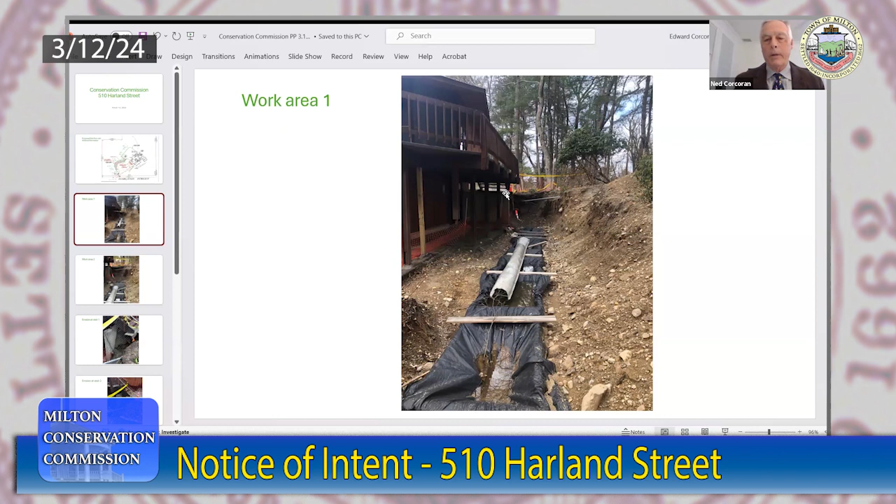This is a look into where the work had started, and the erosion is happening here with ground that has pulled away from the area below the stair. We met with the notion that this was a pretty emergent situation, that we needed to shore this up. And so we asked John by phone after I met with Steve in the field if we could get going on the placement of footings along this area, where the retaining wall would be, and then form the wall so that we could pour concrete. The work would be done by hand, using hand tools and not mechanical tools.

This is another view looking from above down into this area. This has all deteriorated away. It has worn away behind this concrete wall. This is a separate view looking in. You can see how this all has been eroding away with recent rains.

With that, I'm going to turn it over to Bill Madden. We've got 3 fairly simple slides that show the proposed work. And you can see this would be looking sort of into where the work was being done under the porch wall that would be coming this way and then coming towards you in the plan.

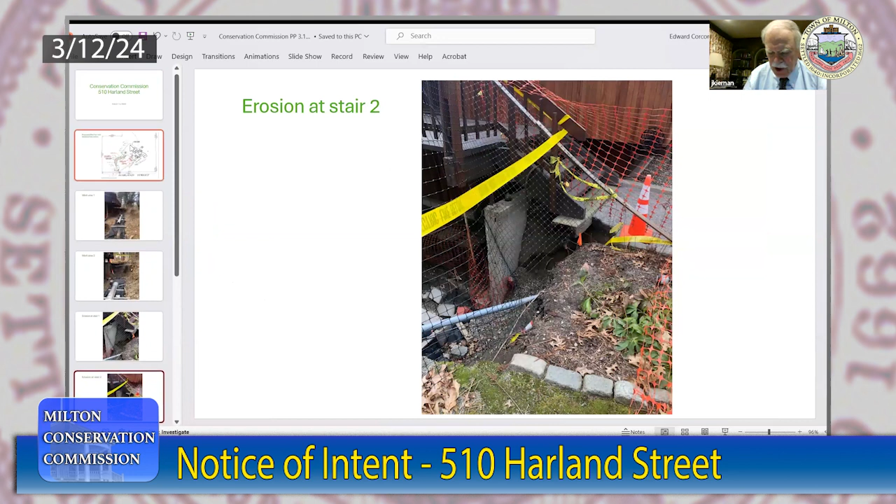Bill? Hey, Ned, before you pass the baton, can I ask you a question? Sure. Not in the picture that you're sharing, but on the previous slide that you shared, the driveway that goes to the right has got that orange line going up the driveway to the house, but I don't know what that is. Is that a utility line? That's a utility line. Thank you. That's just there. It's showing as part of the existing condition. Understood. Thank you. Great, thanks. Go ahead, Ned.

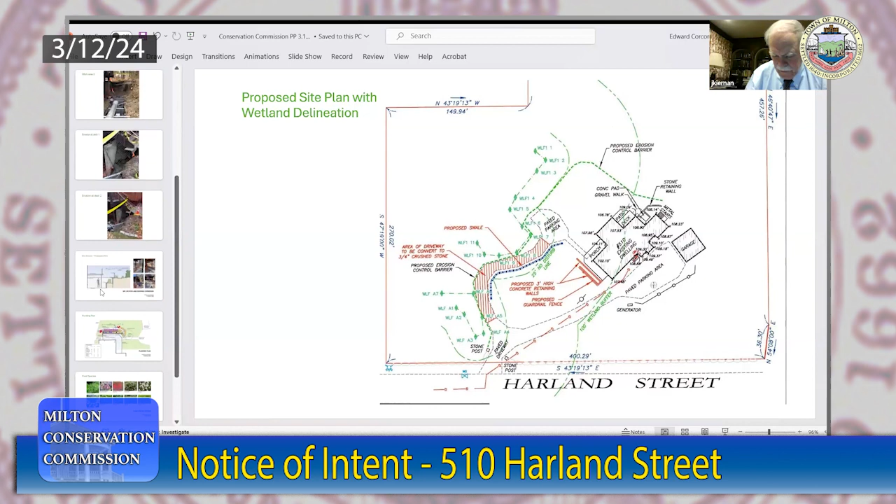Thank you. Good evening, everyone. My name is Bill Madden, landscape architect, and I've had the wonderful opportunity to collaborate with B.V. Williamson on developing a very modest plant palette for this new landscape intervention. As Ned noted, there are 2 retaining walls that were being built to replace the previous timber retaining walls.

And so we have a unique situation where our plant palette needs to do multiple things. And it's very important to us that it does multiple things, as this is a very shady environment. So it needs to be resilient and durable with limited sun, rabbit and deer tolerant or resistant, and also native. The homeowner is very thoughtful and respects this sensitive ecology. So that's a lot of filters of decision making that we've been thinking about with the planting.

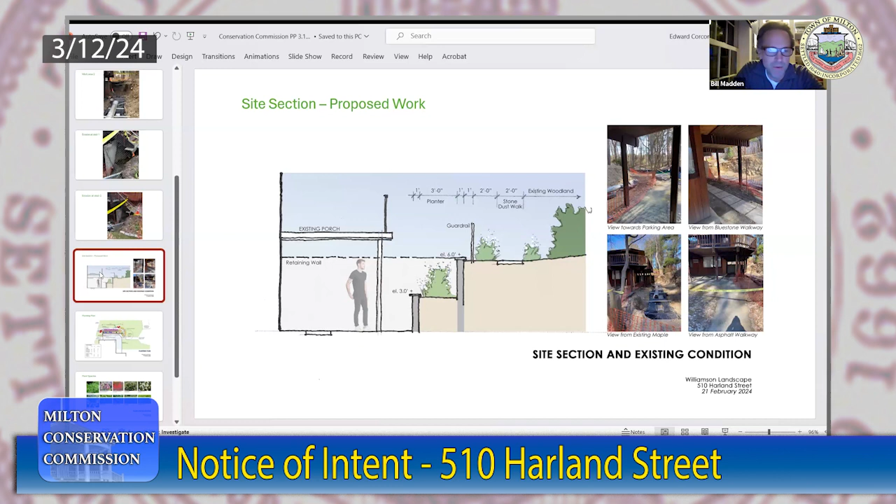Now, if you go to the next slide, you can start to see the planting layout. There is a small stone dust walkway that's connecting the existing driveway to the left that wraps you down the sloping topography to the right. And so in the spirit of being sensitive to this type of landscape, we're proposing a stone dust walkway, so it can be primarily porous over time. And then a diverse plant palette.

If we go to the next slide, Ned, we're using, again, shade tolerant native plants for the most part. And the sweet fern is primarily used for erosion control because of the steep slopes and hardiness within the limited amount of sunlight. I'm happy to answer any questions about the planting strategy for this terrace landscape if you'd like.

I would just point out one thing. This is a different orientation. This is the proposed new retaining walls here. And this is the area where the erosion was really taking place, below and proximate to the stair here. And it's where we felt we needed to get in right away yesterday and shore that up. Where is the material being carried that's eroding from there? Just down into where the trench area had already been. I got you. Right. So just down into here.

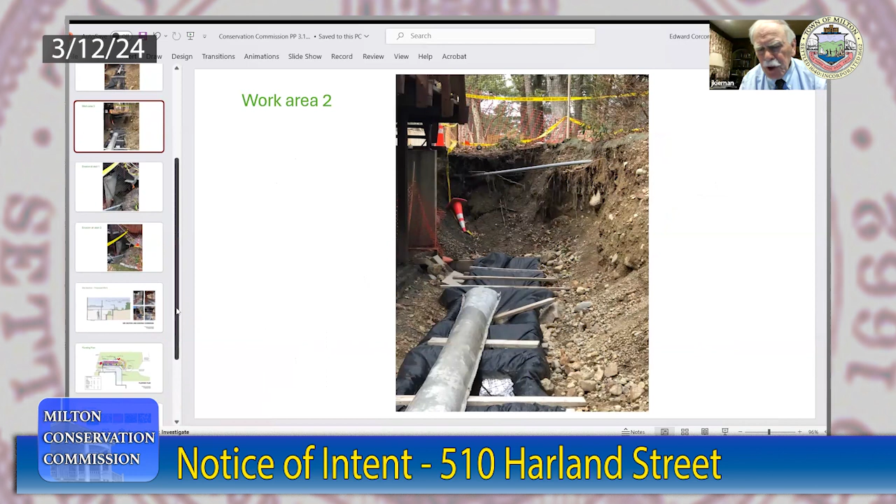Ned, can you go back to that, or perhaps Bill, because Bill mentioned a stone dust path, but I don't see it on your diagram. Where is that located? It's parallel to the retaining wall, the top retaining wall. You see it in a light blue color along the purple plants that we're showing there. Understood. So it goes from the left driveway to the right driveway? Correct. It's high on the left side where the existing driveway is, and then drops down as you move to the right. Understood. Thank you. This is about a 6 or 8 foot drop. So it stairs down.

All right, questions from commissioners? I think Ned has correctly pointed out we should do a site visit to approve the delineation. Before we even get a site visit, are there questions or comments from abutters or members of the public?

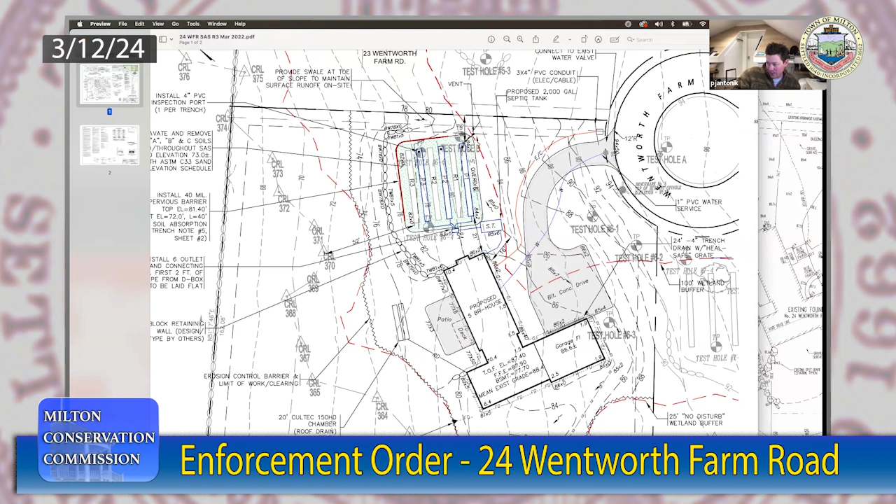And then the second issue was that right around the 86 mark here, and I could show you on a separate plan, there is a 2-inch drain that we added. Now you'll notice down here, you'll see this footing drain, and then on it, a trench drain with heel-safe grate. So this 24-foot, 4-inch wide trench drain that goes along the garage was to be connected to the drainage system that was ultimately connected to this Cultec chamber in the back. So this runoff drain, RD, comes from all the gutters and this drain here.

So in the original design, all the water from the driveway was going all the way to the house. Now we installed this drain and all the drains around the house, and this Cultec system, per the plan.

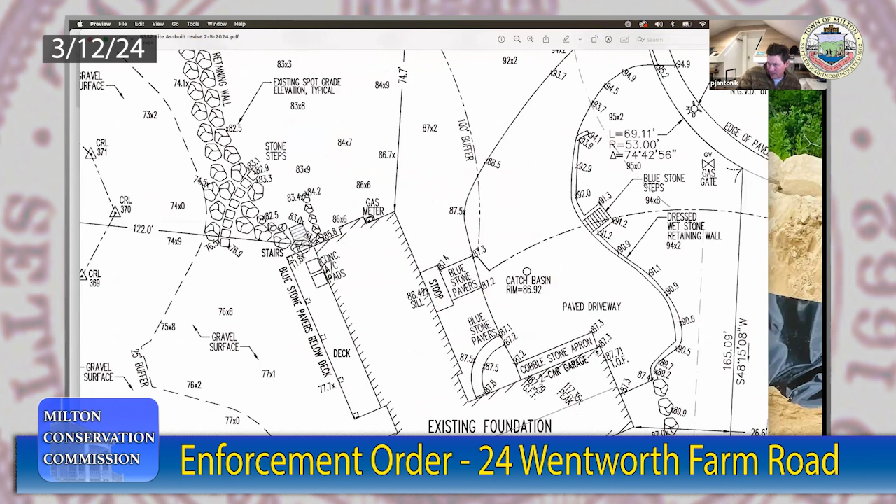We installed the septic, a wall, and this 40 mil liner. This site plan was done when we did the foundation site plan for the permit. You'll notice the catch basin here. He does not notate the drain, but it is installed at that cobblestone apron. He shows this boulder wall here that we installed.

Sorry, who's the 'he' that you're referring to? This is the site engineer who did the original plan. Who was that? Jeff Kane.

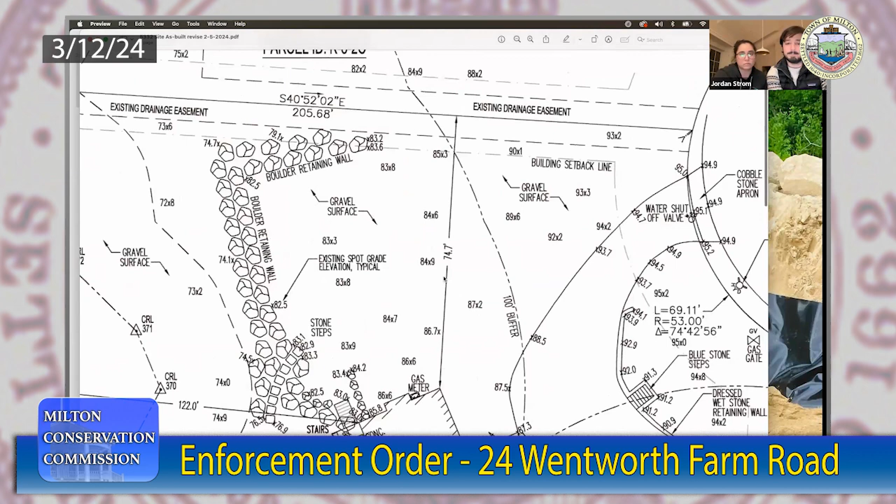Jeff Kane, yes. When we were working on the septic, Jeff wasn't as readily available and he was holding us up because of his schedule. So we ended up using Terry McSweeney, an engineer out of the South Shore, to do our septic as-built, which is right here. The septic as-built was approved by the health department and signed off on the 28th with a certificate of compliance. You'll see, as notated, the 40 mil rubber membrane along the wall.

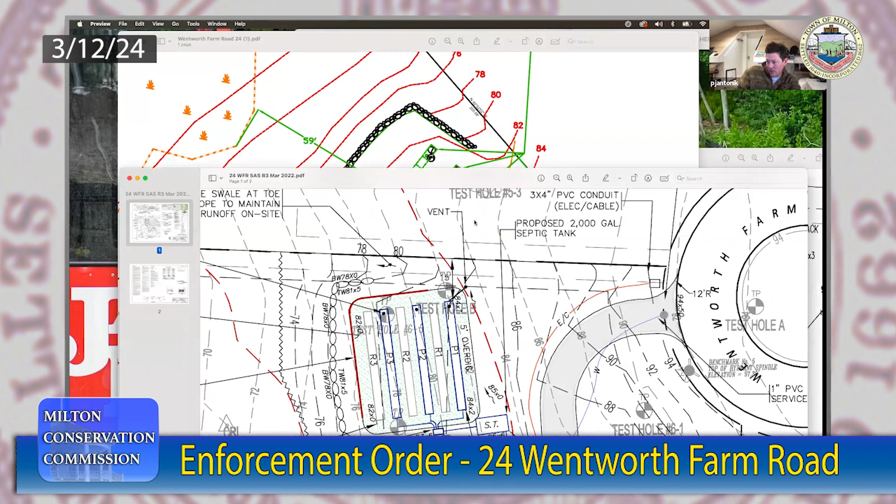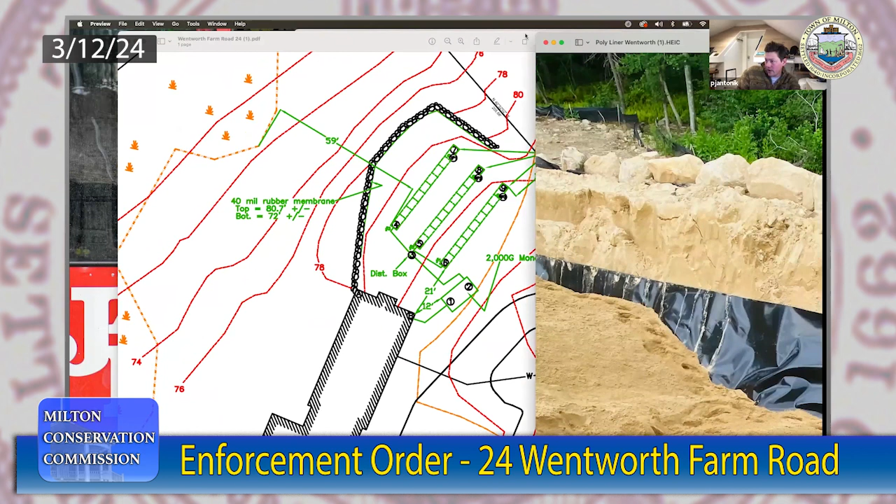Another note I want to mention is that we're 59 feet from the wetlands with our actual system, whereas originally the distance was 52. So we are further away from the wetlands with our system. This was approved and the COC was issued. You can see the mil liner right here against the block wall. And then lastly, this is the engineer's letter stamped by Bowdon Engineering certifying that the wall was sufficient.

Now you'll notice there's significant erosion just because there's no plants yet, right? So we're not concerned about the erosion. I was there today, actually, after all that rain. There's a couple issues here and there, but considering the amount of rain we had and the fact that there's zero grass, I was pretty impressed with the lack of erosion.

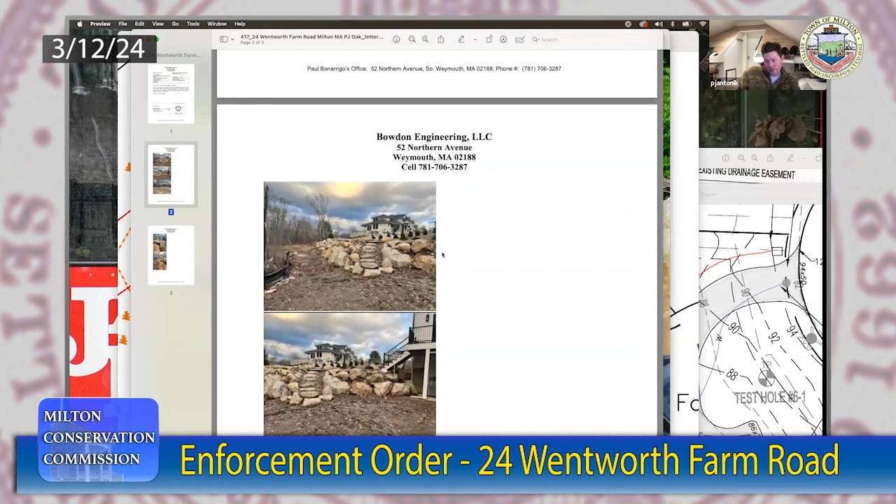So we're putting sod in on the area above the wall here in two weeks. And we're going to also be planting the rest of the grass around the back with seed. So the erosion should be mitigated once all of that vegetation takes hold.

Now the last thing is the drain, which was installed here. That drain wasn't anything but, and again, you can see the catch basin right here. That is purely to catch the large amount of rain coming down the driveway, because the house was getting flooded due to the large amount of rain.

And I can show you here. Forgive me here for a minute. The catch basin—can everybody see that? Okay. Yes, yeah, we can see it.

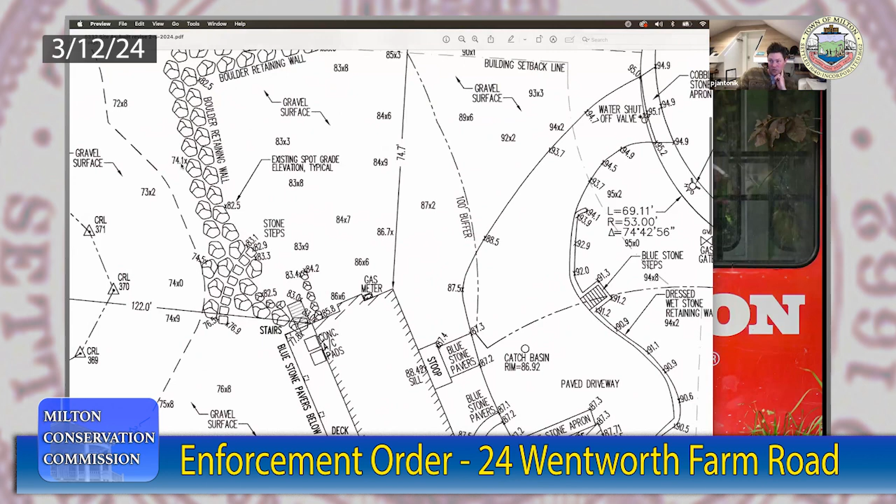So again, to recap, we have the catch basin, which we put in to help mitigate the large amount of water runoff from the street. And then we have the stone wall, which we put in as designed—what's it say here? The type of design by others. We ended up going with the retaining wall made out of boulders from the site, avoiding transporting them off-site, saving money, and also the natural aesthetic is what my client wanted.

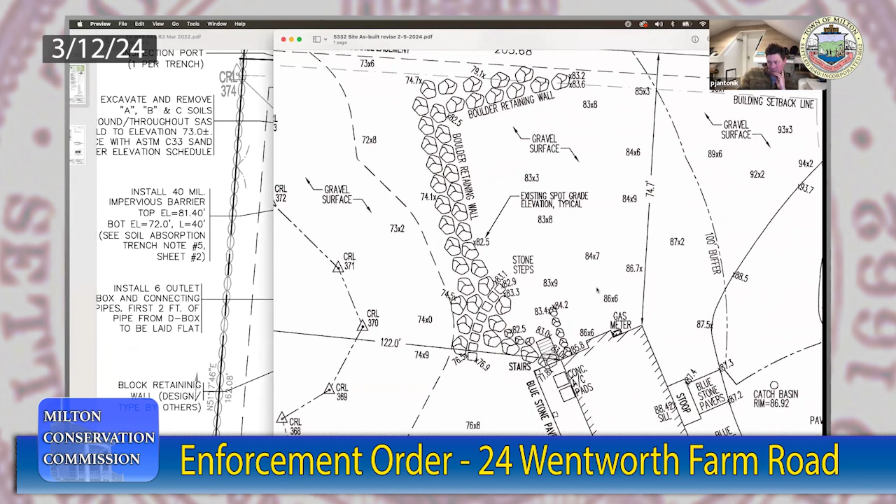And then obviously we put the septic in and had it approved. Moving forward, our plan is to finish the vegetation to stop the runoff. And then once everything is established, we would remove the erosion control, but leave it in place until all of that is established.

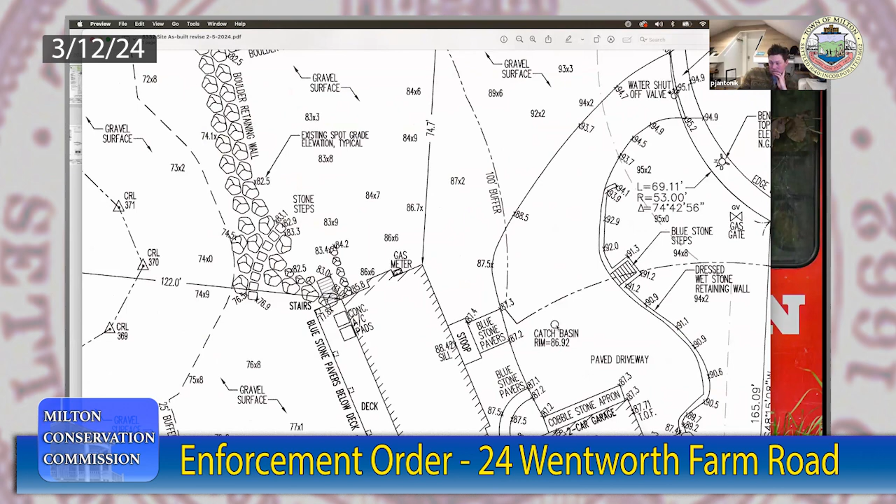I understand what you said about the catch basin right around elevation 86, and you're piping it sort of up in the diagram as we're looking at it, to that corner right there. Correct. But in your original calculations for the size of the Cultec chamber in the back of the home, is this an increase in water?

I understand that the water would have gone into what I would call a French drain or the trench drain anyway, but it sounds like it's more water than anybody expected coming out of the higher elevation, whether it's overtopping the detention basin or just coming off the street or whatever it is.

No, I think in a normal rain event, it's the exact same amount of water because it's just the water from our site. And honestly, in a regular rain event as well, the water would have just sloped toward the house, right? And so we had some leaks in the basement. We had water going into the garage, and we just didn't feel that the original design was going to handle...

Listen, the way that this site was so difficult with the way that all the elevations were, there was no way to anticipate the exact runoff a year and a half prior, right? Once the site is completely designed, sometimes you have to make on-site changes to adapt. And listen, we could have left it and I could have pitched the driveway to go toward the garage and it all could have gone into that drain. But I just felt uncomfortable with that. So we added the second drain just as a precaution.

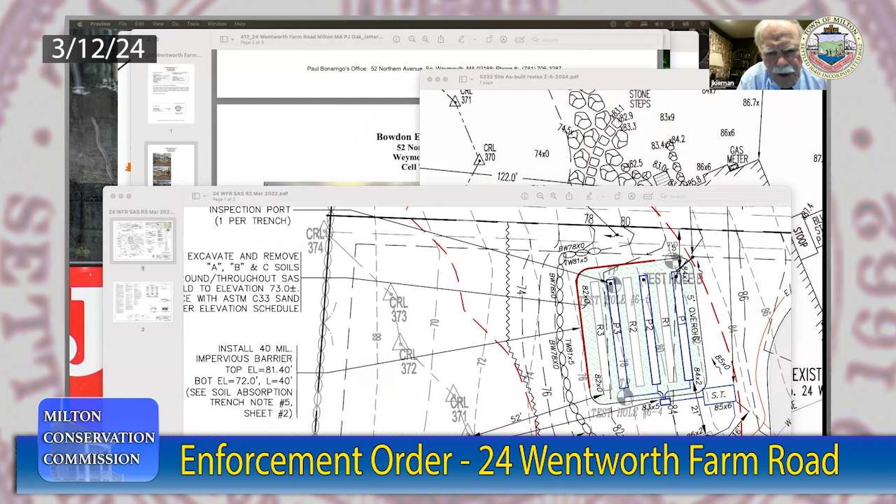It does. Can I ask you this? The pictures that you just showed us and you actually submitted earlier to the commission, am I correct that those pictures showing the garage were before you had done the grading exterior to the house? And prior to putting in the cement floor of the garage? Yes, you are correct.

And I think what it was is we had so much water come in that it made us nervous, right? And so this grade is probably 8 inches lower than the final concrete slab, right? But it's a lot of water, and it was ending up seeping into the basement over where I'm standing when I take this photo, right? So water is a developer's enemy when it comes to turning a house over. The last thing we want is calls saying that my basement's flooded. So it was just a precaution to put the drain in so that we didn't have any further issues.

And if I can add to that, even after the concrete floor went in for the garage, and everything is said and done, we still get some water in the garage, even with the existing drains in place. And so this is still minor amounts of water compared to what we were getting beforehand, for sure. But it is some amount still.

All right, thank you. Now, we did receive, and it's now part of our record, the notice from Bowdon Engineering saying, and I'm quoting here, based on the size and placement of the rocks, I find this gravity wall is acceptable to perform its intended function to restrain the soil force to overturn the wall. That's not exactly what we'd be looking for if we were considering a certificate of compliance for the septic system.

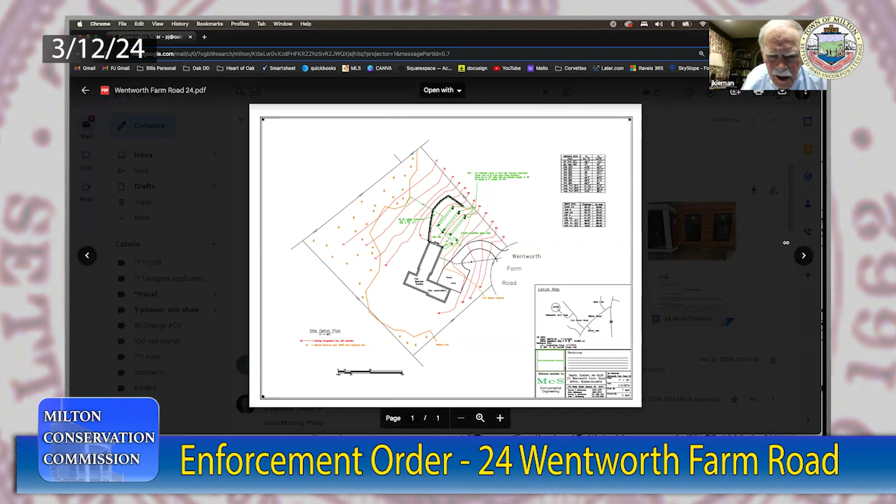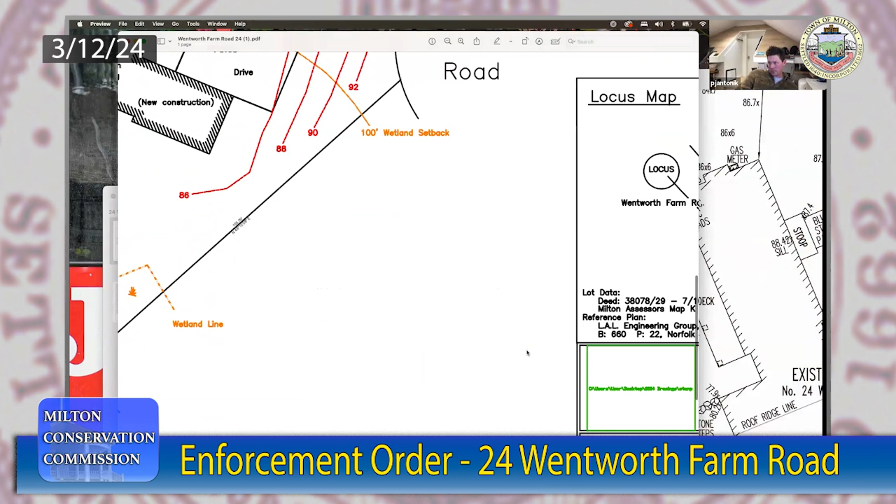And did that person observe this before it was backfilled or not? Yes, he came out, he did the as-built based on the in-person site visit. He created the as-built and he submitted it to the Board of Health. What date did he view this? Give me 1 second. Sorry, just trying to find the right file here. This was done on January 4th, 2024. Well, it was backfilled back in what, September or October, so he clearly didn't see it.

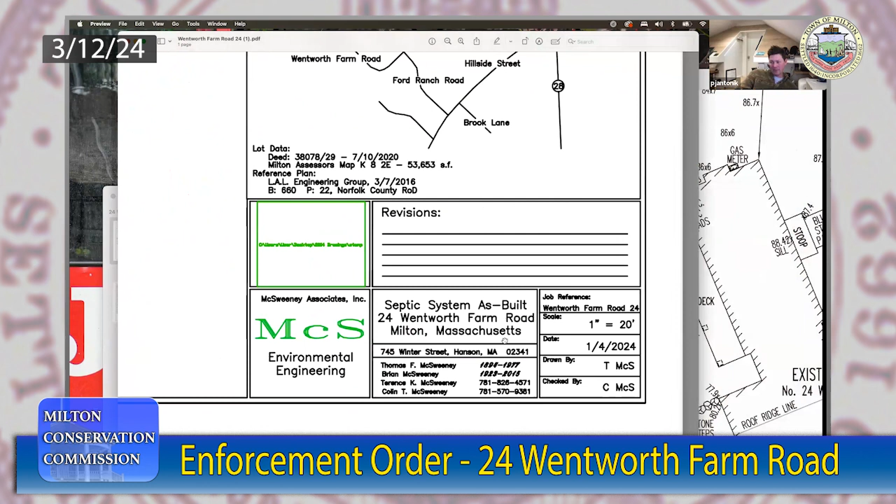All right, he issued the plan then. I'm not sure when he came out. I mean, I don't understand. We're not here for a Board of Health meeting. We're here for a conservation meeting. And what I can tell you is that I had a septic engineer come out as a result of Jeff Kane not being available and holding us up for months at a time. I had a separate engineer come out, certify the system, approved it, did an as-built, submitted it to the Board of Health. They approved it and gave us a COC on the system.

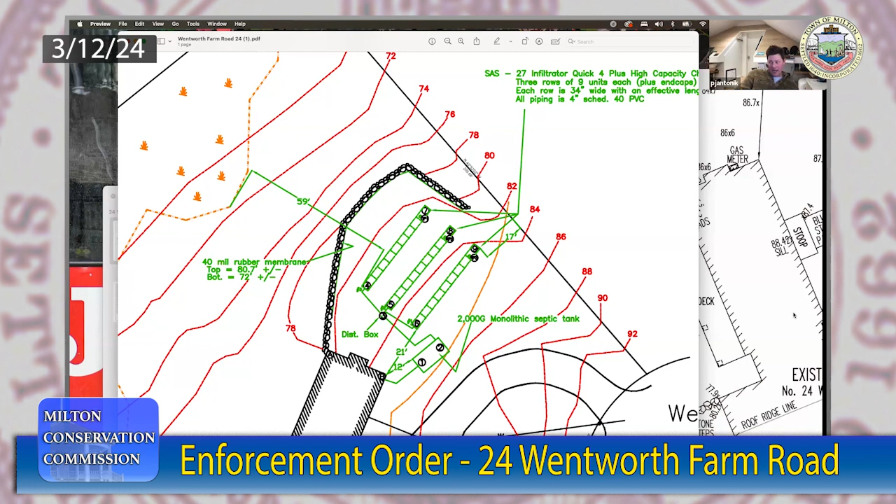We put it in legally per Title V regulations. We shouldn't even be talking about this. This is an approved plan that was certified by a septic engineer. What we're here to talk about is a wall that we designed that I had no direct guidance on this plan. It says block retaining wall designed and typed by others. We chose to go with a natural wall, which I've done hundreds of times in my career. We put the poly liner in. It was right here. You can see that he located the poly liner per the plan. And I had an engineer sign off on the wall.

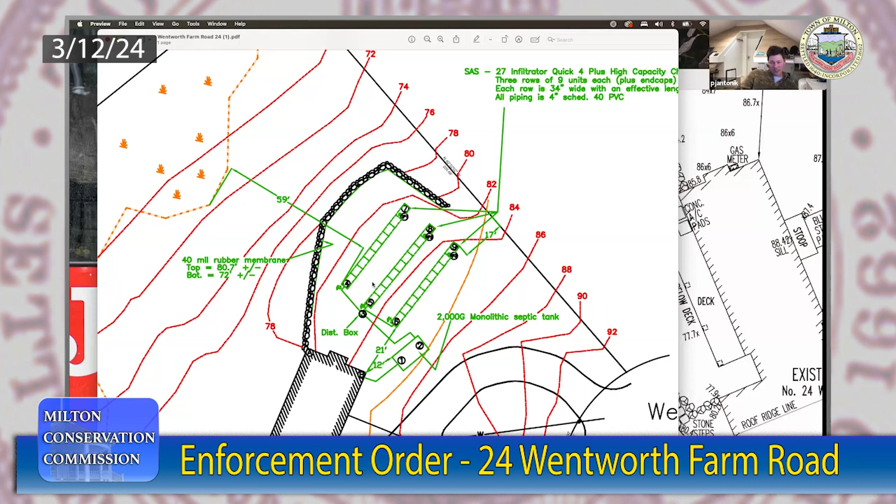Now, if you're telling me that you're unhappy with the engineered letter, I can have Bowdon engineer revisit it and see if he feels it's suitable to retain the leach field and the septic system and amend the letter. If that's what you're asking me to do, I'm happy to ask Bowdon to do that. But I'm not exactly sure what else you need me to do here to show compliance with the plan that was approved, notwithstanding the building department, notwithstanding the Board of Health. We issued a plan that was approved by an engineer with whom we have dealt with for many, many years. And that's fine. And we find him to be credible.

We are now looking at communications, and all commission members have copies of the communications between you and Jeff Kane. And it appears that he was available. He did go. In fact, there are actually 5 items, and I only got to number 1. And he said, essentially, as I read this, I can't approve this plan because you didn't do 1, 2, 3, 4, 5. 2, piping from the foundation to the D box should have no 90-degree elbows, 45-degree bends per plan. 3, all piping should be haunched along its entirety before backfilling to prevent differential settlement or deflection caused by unsupported pipe, evident at sewer out of septic tank.

Number 4, vent not installed. Number 5, infiltrator chambers are not designed for filter fabric to be draped or wrapped around chambers. Fabric needs to be removed or manufacturer's certification provided that this installation method is acceptable for septic applications. Overall, the system is set approximately 1 foot above design elevations between foundation invert at plus 1.39 feet to D-box out invert at 0.80 feet. When final backfill is placed, care will be needed to ensure minimum cover heights are achieved. These are 6 red flags to us.

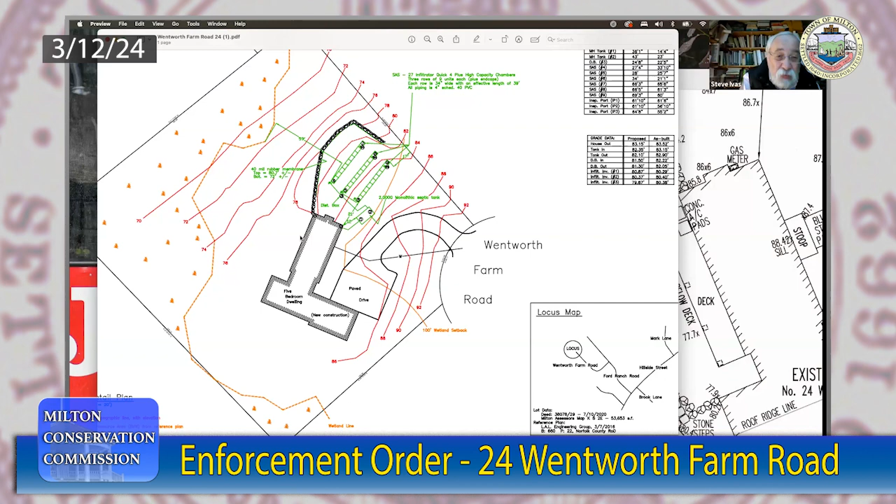Yes, I'd like to add an issue. I don't see anywhere on the plan an as-built for the small drain; when it fills up in 25 years of time, they'll never find it. The small drain that runs from the small catch basin to the corner of the house. That would be the northeast corner. So it's not on the plan. We're missing a line on the plan, which is very important. That is a result of Jeff Kane's as-built that he provided.

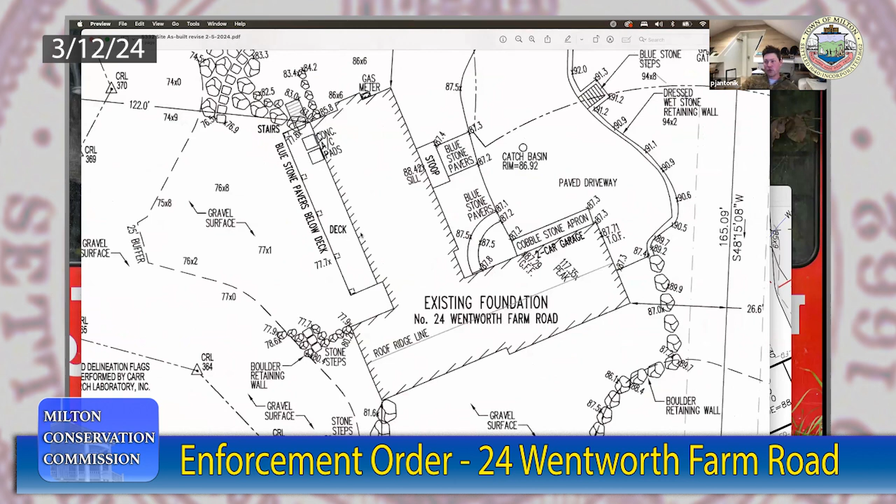How could it be Jeff Kane's as-built? Didn't Mr. McSweeney do the as-built? No, so I had McSweeney do the septic as-built. Toward the end of the project, when we needed the as-built for the house itself, Jeff was the only one that had the files, and we asked him to come out and do the final as-built of the house and the wall and everything else on the property. We did not ask him.

Let me ask you this then. Was the catch basin installed when Jeff came out? It's right in front of you. Yes. Well, I see it there. So why isn't there a line? I don't know. Okay, so it's deficient. Jeff Kane decided not to put those lines in. Sir, if you're not working with Jeff Kane anymore, you can't blame him for something that's not on your plan. But he did this plan.

Listen, guys, all I know is that we have produced an amazing project for my client and for the town. We have been very cooperative. Steve, you can even say we've had multiple phone calls about issues, i.e. Todd Hamilton has called to complain about us and our site. And we've never been out of compliance. We have been rigorous with our erosion control. We have been clean as a button over there. We've done everything we need to do. I provided an as-built. I have a certificate of compliance from the health department. I have an engineer's report.

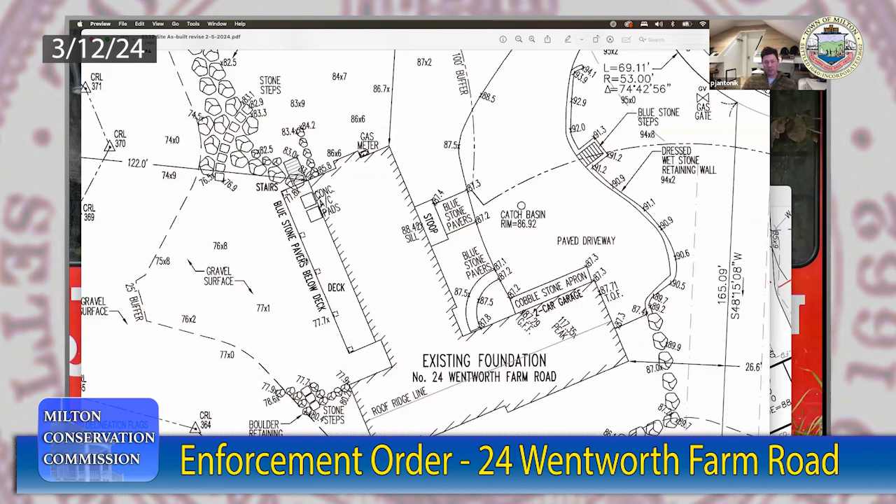I think the bigger issue here is that I'm up against Jeff and Todd, who are in bed with everybody on this call, and they don't like... Oh, my. And that's fine. PJ, you're killing yourself. You're killing yourself. That's fine. But Dr. Straub, you better get your agent in control.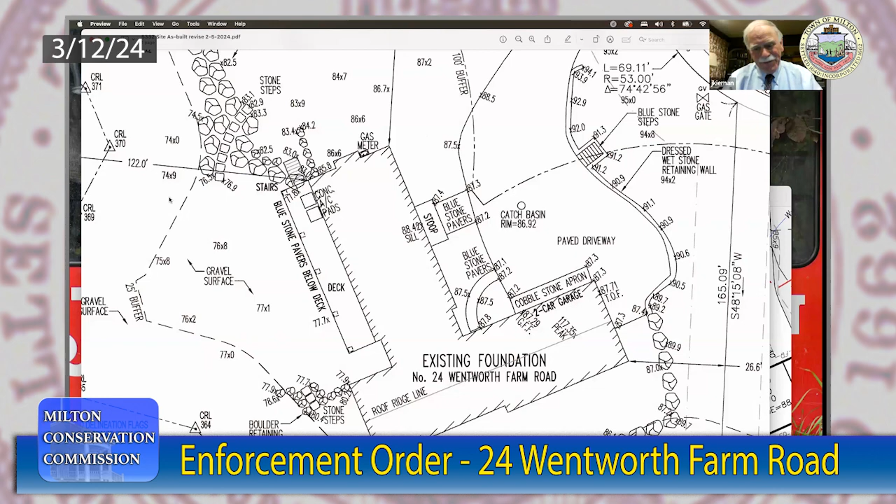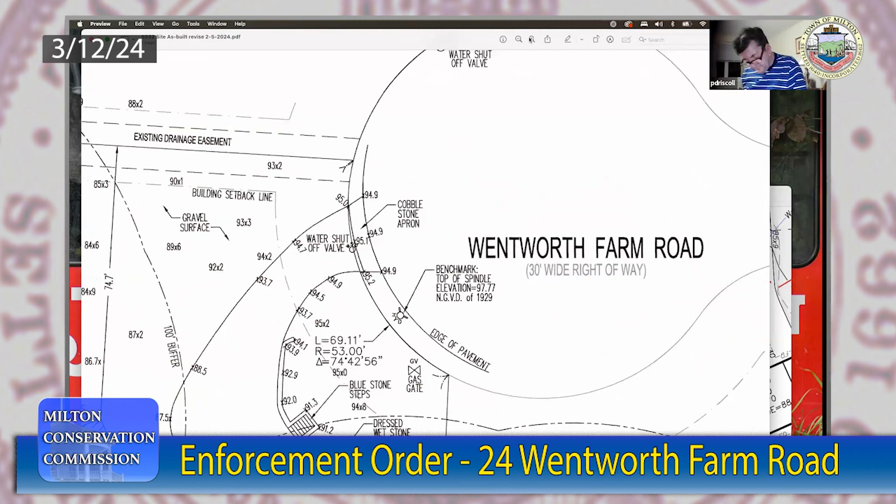All right, I'm going to stop talking, but the bigger issue here, let's talk about the runoff from the street. What are we going to do about the hundreds of gallons of water that come out of that catch basin into my client's property? Well, I could jump to that and we can return to this issue. At our last public meeting, I asked you whose responsibility it was to clean the detention basin, which is clearly filled with debris and sediment. And you said it was the developer.

I then reached out to Attorney Marion McKettrick, and the commission members now have a copy of a letter to you in January of this year, which incorporated by reference the letter from December of 2022 that has been recorded in the Norfolk Registry of Deeds. It says that the homeowners are now in charge of the homeowners association, and the responsibility for cleaning that detention basin belongs to the homeowners association. It is not the developer's responsibility to clean it.

And you'll note on our agenda tonight that we have some folks upstream from you, and we are equally as concerned as the Strom family about getting that cleaned. But I don't think you can put that back onto the developer. That, first of all, was not me. Whatever, who cares? All I know is that today I was there and it was full again.

I agree. Dr. Strom? Yeah, what I was going to say is that is a problem. If it is the homeowners association, we have not yet had a meeting of the homeowners association. There was an expectation that the Town of Milton was going to finally finish the road once everything was done with the construction of the houses on the street as well, which I don't believe final paving has been done. And I believe you're correct in what you just said.

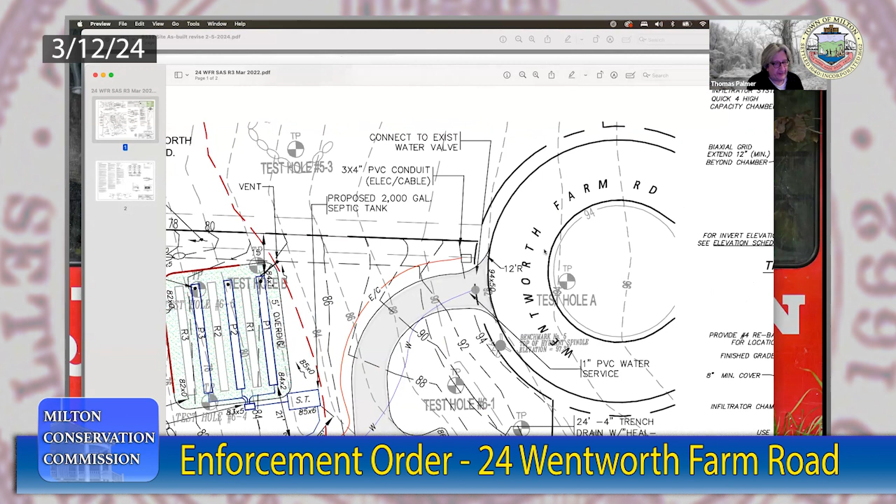That's okay. So in between the two properties, there's actually an easement that's not marked super clearly on this plan. But right here, this dotted line and this dotted line, there's a 10-foot or 15-foot easement down into the woods, and this drains down into there. There's a pipe through there. There's a pipe through there, yes. That was my question. There's very little drainage infrastructure on any plans we've seen, so I really don't understand how it works. Like the drain that you put in, how does that get under the house and downhill?

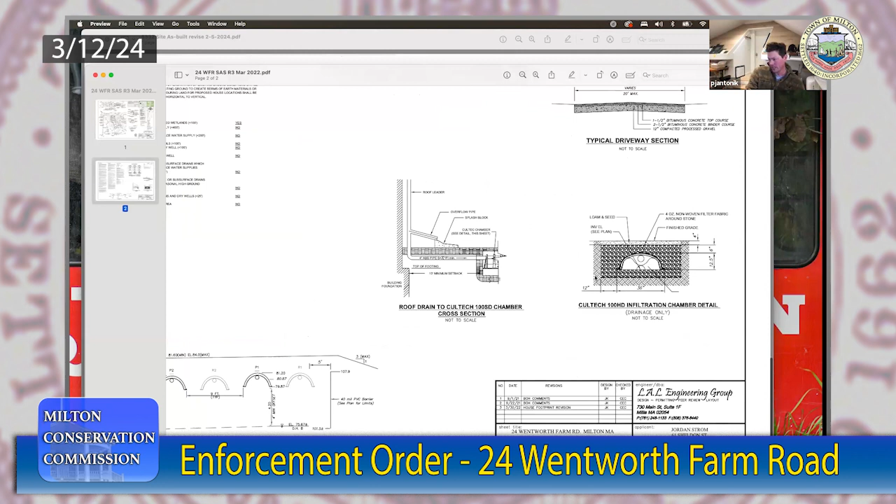We just did simple rain drains, so all the leaders go into 4-inch PVC pipes on every corner, and they flow around to this chamber in the back. It's a Cultec chamber that was designed by Jeff. Where is it here? Right here, the Cultec 100 HD. So this we installed per the plan in the backyard, right behind the patio, and all the pipes from the corners of the home and the 2 drains go into that per the plan. And you added the driveway, sort of. Well, yeah, I added the additional drain in the middle of the driveway. Yes. All right. It's hard to tell because, as Steve said, there are no lines connecting these things.

The other thing I suggest is we can walk out there and do a site visit and walk through the whole thing. I'm sorry, Mr. Chairman, that still doesn't provide an as-built plan that shows where the drainage is. You need that. Again, 25 years in the future. I'm happy to do that for you. When it doesn't work any longer, you're going to want to know where those lines are. It sounds like it's already not working, so yeah, I'd like to see that.

But I'm not sure that would normally be on this plan or the adjoining property owners. It sounds like it's going right down the property line. Yes. Yeah, that would obviously be out of our jurisdiction. That would be the plans for the neighborhood itself. And like I said, I'm happy to have an engineer update. We took measurements and located the Cultec chamber ourselves, so we could easily dig it up or show them where it is, and they could locate it and locate all the pipes on a plan for our plan. And that I'm perfectly fine doing.

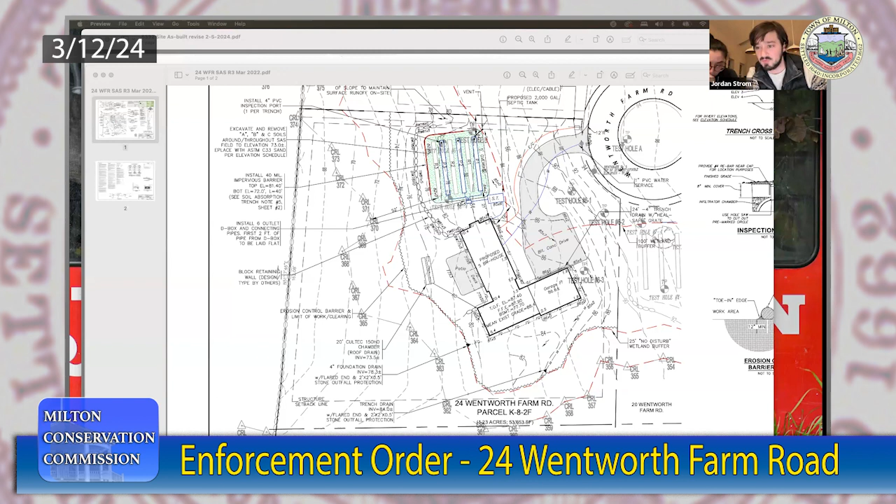May I just ask a question? Sure, sorry to interrupt. We've used Merrill Engineering out of Hanover in the past and have had good experiences working with them. Is that somebody who would be reasonable for this commission to approve? We've used Merrill on a number of occasions. It would be one of several we could consider.

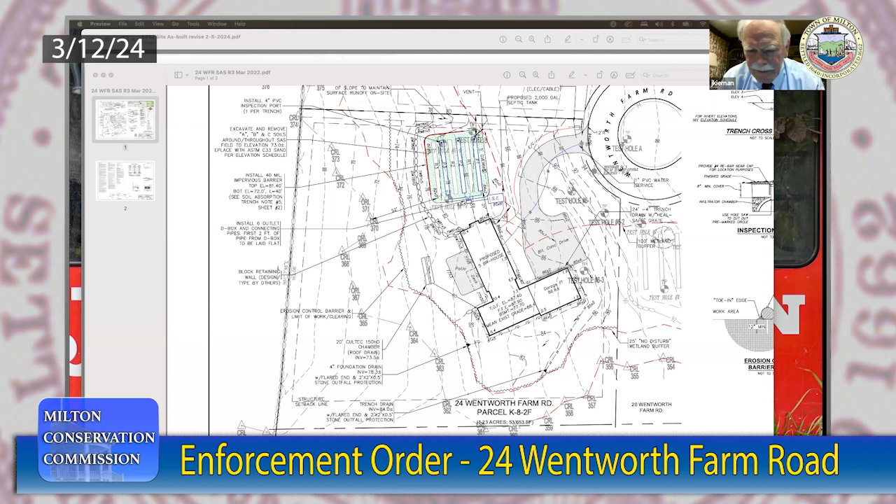Yeah, we have no interest in directing it one way, but our standard procedure, pursuant to municipal bid laws, requires us to ask several parties. But they've got a good reputation. Okay, all right, any other? I don't think we need... well, maybe we do need a vote on this.

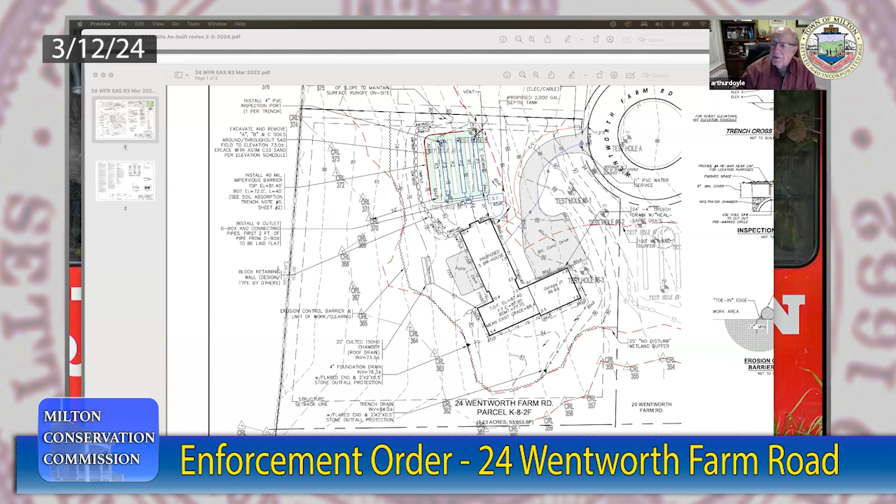John? Yes, I just wanted to chime in on a couple of things. I came out pretty much the same place as Hans, and think all of the issues mentioned should be documented so they can go to the new engineer, so that party can clearly understand what all the issues are. They should also have, I would think, all of the past correspondence, so they have a clear understanding of the situation they'll be remediating.

I wanted to ask if we as a conservation commission have a responsibility to address the drainage problem at the cul-de-sac as it impacts any of the residences in that area, distinct from what might be the responsibility of any individual property owner. And then I did want to ask the applicant, with respect to the flooding continuing in the garage, if that flooding was coming in from the outside as sheet water, or due to an elevation in groundwater seeping up through the foundation into the garage.

I'd like to know that clarification. It's a good question. I think it is coming under the garage, under the garage doors specifically. But it's just a small amount at this point in time, and I believe there's a plan to put a rubber sealant in. Okay, I was hoping that would be your answer.

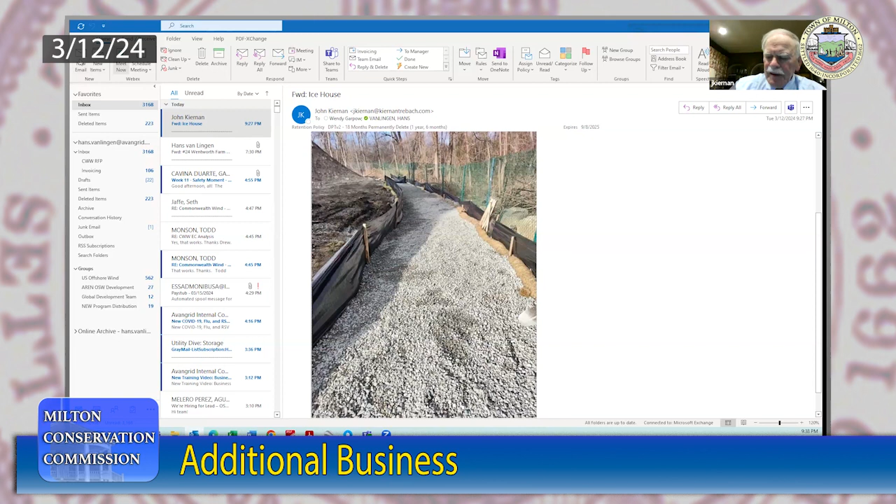Thank you for responding as quickly as you did, Charlie. I appreciate this, and the photo looks like you took care of what needed to be taken care of. Thank you. Thank you for your time. Apologize for the inconvenience. All right, thanks all, thanks very much, Charlie. Thank you, everyone, thanks all.

Next, under additional business, Steve, I think you said you had some other things. Yes, I just wanted to inform the commission that we had a preliminary meeting among all the parties, except for DEP, for the 693-711 Randolph Ave project.

There will be another preconstruction meeting. Hans is laughing — he understands exactly what's going on here.

Somebody forgot — not myself, but the proponents — to contact DEP because they realized too late that this is a DEP superseding order of conditions they're operating under, not a Milton Conservation Commission order of conditions. So we had a preliminary meeting.

During that meeting, the contractor said he had done work crossing a wetland similar to this before. I asked where, and he said 3 miles away from Milton at Balancing Rock Road in Canton. If you want to go take a look, there are mature trees within closer than 10 feet.